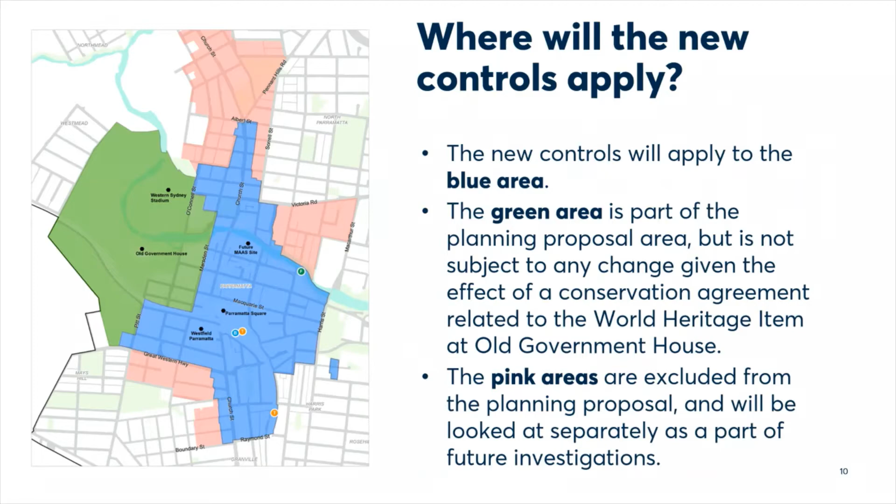So what will the planning proposal seek to do? So there are a couple of slides on this, and I do want to spend some time on it because these are very much our key objectives as a council. The first one is to expand the commercial core land zoning. Now, this will increase the commercial amount of floor space, therefore bringing an increased amount of jobs to the CBD. The B3 commercial core zone is proposed to be increased in size from 22 hectares to 38 hectares. That equals about a 75% increase.

This planning proposal also seeks to increase building heights and floor space ratios, which enables more apartments and office towers, bringing again more jobs and homes to the CBD. It amends the existing bonus floor space controls that encourage high quality design buildings, typically called design excellence, and also introduces new controls for high performing buildings.

It also has a fundamental component where it does also protect solar access to key public spaces, to protect those public spaces, particularly in winter, and also significant heritage items such as Lancer Barracks and Experiment Farm.

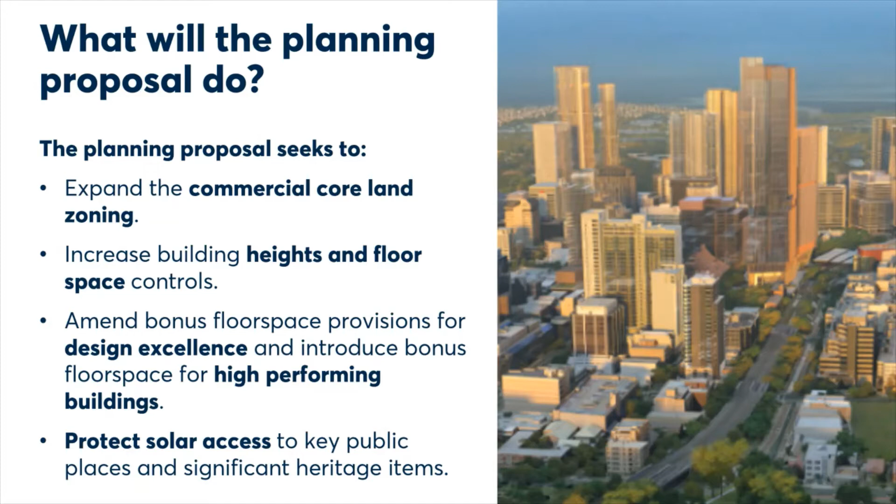Now, the planning proposal does seek to provide incentives for additional office and commercial development to facilitate the jobs and the services that we are seeking in the CBD. The planning proposal does seek to require new mixed-use residential towers to include community infrastructure as part of their development, which applies when development is seeking to utilise the additional floor space being offered under the planning proposal.

Now, what do we mean by community infrastructure? It essentially means things such as community facilities, public places and recreation facilities, and I'll get into a little bit more detail on that in a moment.

The planning proposal does provide controls which aim to protect heritage, including additional heritage controls and lower heights in some areas to protect heritage streetscapes or to minimise overshadowing on heritage conservation areas. It does require the ground floor of certain buildings to be activated with activated uses such as cafes and shops, so they provide interest for passing pedestrians and vibrancy along our streets.

The planning proposal also includes the following. It does reserve land for road widenings, bicycle lanes, etc. That's very important to protect future transport needs, particularly when we are proposing to increase density significantly. It does propose lower rates for car park provision, similar to those that you'll find in the Sydney CBD.

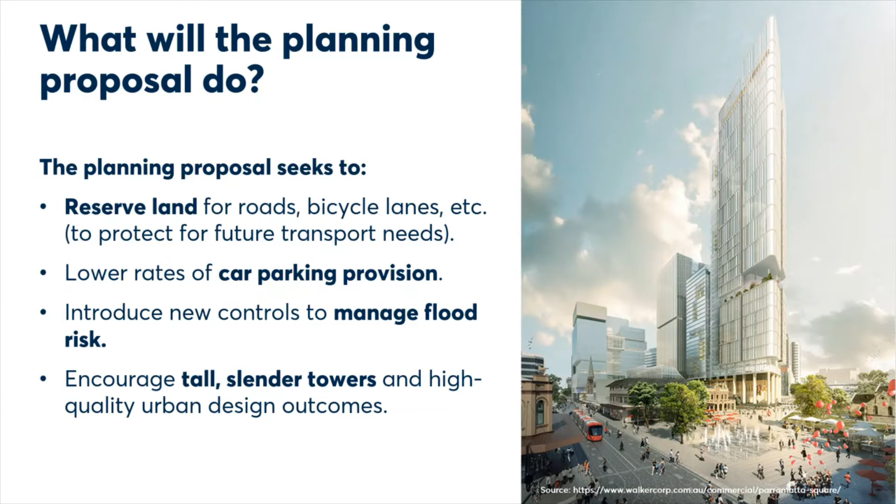So now I'm going to focus on some aspects of the planning proposal that might benefit from a more detailed explanation. I'll start with building height controls. So you will notice, if you have had a look at the planning proposal documentation, that there are two height maps in the documentation. The first map is referred to as the base height control, and it generally reflects the existing height controls in our current LEP 2011. It does also reflect site-specific PPs that have been notified or gazetted up until the 31st of July.

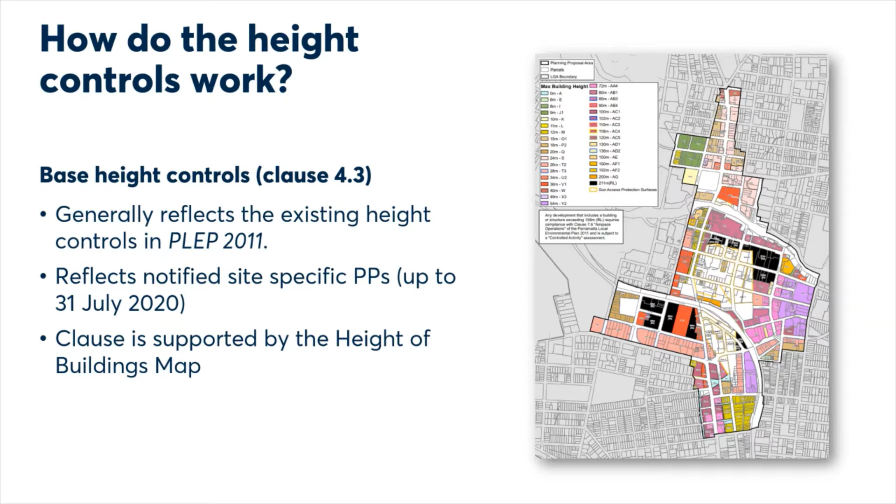Now, there's also a clause that supports the height of building maps. This essentially just identifies the base height control that's applicable to land within the CBD. There's then an incentive height controls map. So the first one was base, and this one's called incentive. Now, this applies to land that is zoned B4 mixed use, and can only be taken up if community infrastructure is provided under the proposed clause 7.6H. Now, this map again is supported by a clause.

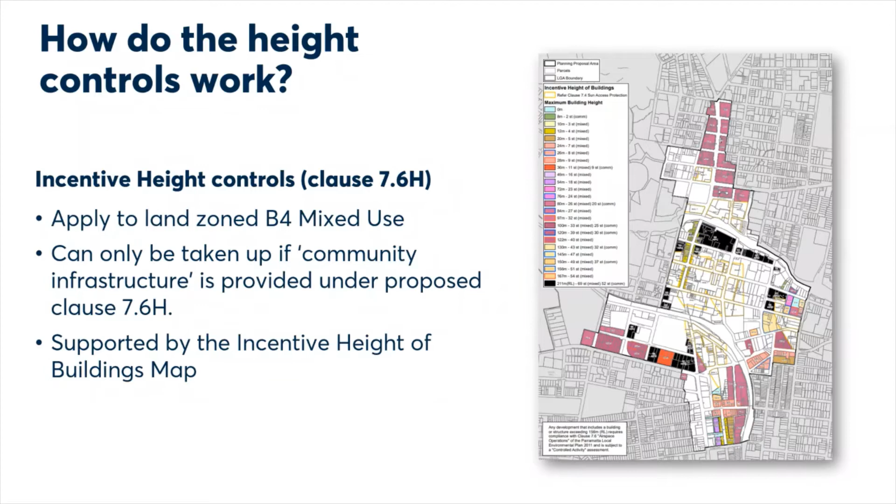Now, you will see that there is a fair amount of uncoloured sites on this map, and the reason for that is that these sites are zoned B3 commercial core, or have no uplift in height due to heritage, urban design or sun access requirements. These have all been backed by supporting technical studies, and so therefore the maximum heights for these sites are those that are shown on the base height map.

So both the base and incentive heights have a maximum mapped height of 211 metres. So that's roughly about 60 stories for a resi building and 53 stories for a commercial building. When combined with the design excellence bonus of 15%, that will allow buildings up to 243 metres. So that's about 75 stories for a residential building and 60 stories for a commercial building. Now, it is important to note that any height in the Parramatta CBD that is above 156 metres RL is a controlled activity under the Airports Act, and therefore requires referral to the relevant airport authorities.

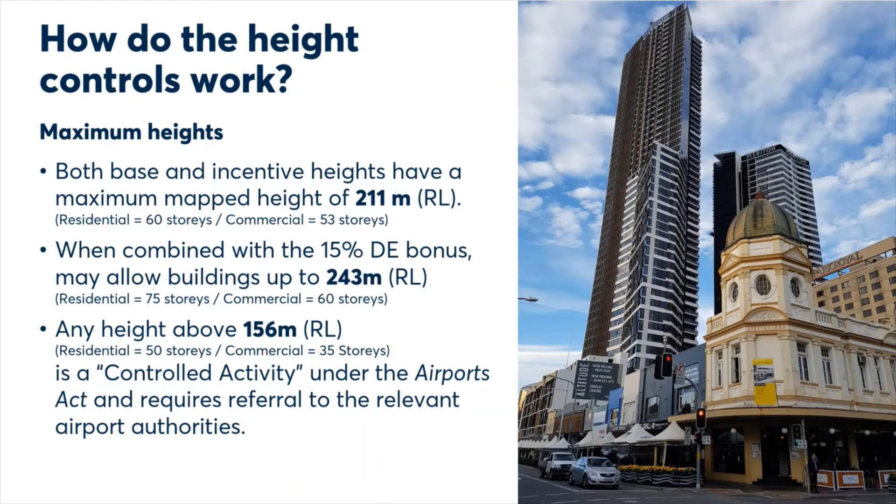Okay, so now I'll cover the floor space ratio controls. These are a little bit more complex than the height controls. But similarly, if you've had a look at the planning proposal documentation, you would have noticed again two FSR maps. There's a base FSR map and then there's an incentive FSR map. So with the base FSR map, generally, again, these reflect the existing FSR controls that you will see in our current LEP. This map has been updated to reflect site-specific PPs that have been gazetted or notified up to the 31st of July. The base map is not subject to the FSR sliding scale, and again, there's a clause that accompanies this FSR map.

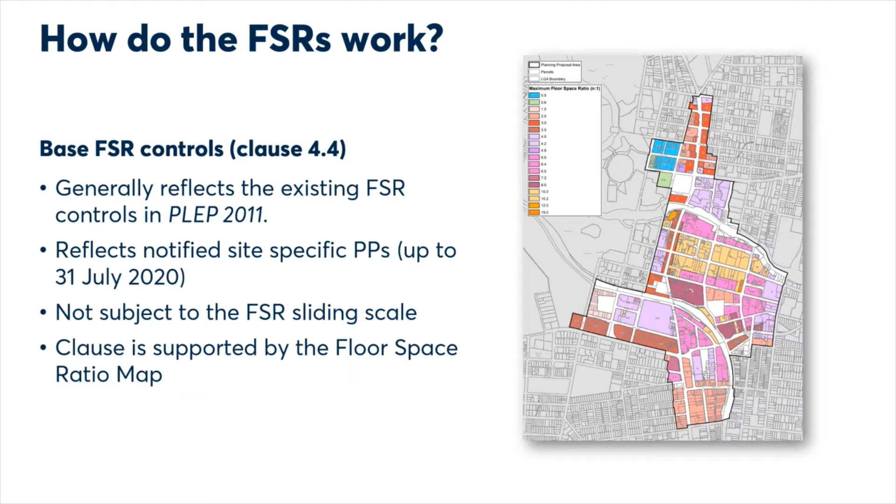So there is also the incentive FSR map. This applies to all land zoned B4 mixed use. And again, this can only be taken up if community infrastructure is provided on the sites as described within the clause within the documentation. And again, this is supported by a clause. Now, you'll see again, similarly with the incentive heights map, that there are uncoloured sites on this map. Those uncoloured sites are essentially those sites that are zoned B3 commercial core, or again have no uplift in FSR due to heritage, urban design or sun access requirements. And so therefore the maximum controls that apply for those sites will be the base FSR map.

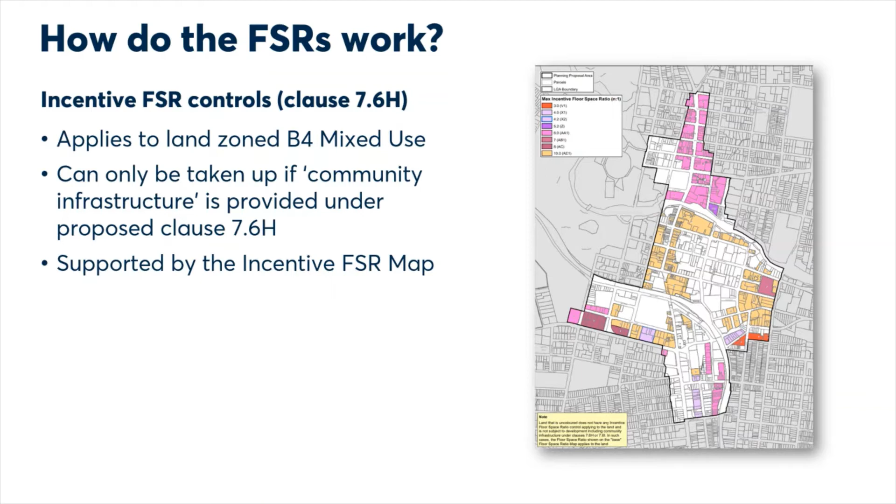So how do these FSRs work? To address the increased demand on infrastructure, Council does need to assist in providing new or enhanced infrastructure. And so the provisions within the planning proposal require certain development utilising the incentive FSR and height to provide community infrastructure. Now, this community infrastructure includes things such as community facilities, public space or recreational facilities on sites.

Now, the important point to make here is that prior to completion of the planning proposal, Council will need to undertake a review of the infrastructure funding framework for the CBD, including the preparation of a new development contributions plan to assist in the funding and the delivery of community infrastructure within the CBD, particularly when we are seeking a significant increase in dwelling and job numbers over the 40-year period.

So a bit more on FSRs, particularly when it comes to design excellence. The Council is very passionate about raising the bar when it comes to the delivery of design excellence, not only through our public domain work, but then also in buildings. So we have revised the design excellence controls as part of this planning proposal. So fundamentally, our objective is to promote and to secure high quality development.

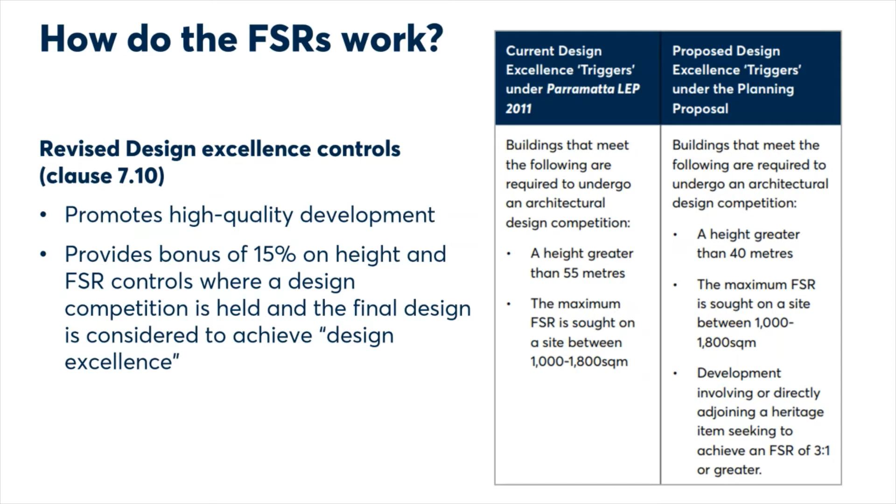This planning proposal also seeks to introduce a new provision that's not currently within our current planning framework, and that's the high performing buildings clause. Now, it does provide a bonus FSR of 5%, subject to achieving higher environmental performance above BASIX. Now, this would apply to sites with a 6 to 1 FSR or higher. And the bonus FSR is only applicable for residential flat buildings and mixed-use developments that include a residential component.

Mandatory environmental performance requirements for certain commercial buildings are also included. The specific requirements include achieving specified targets for energy emissions and water use. And this is very much around increasing and elevating the need for better designed and performing buildings, particularly from an environmental perspective.

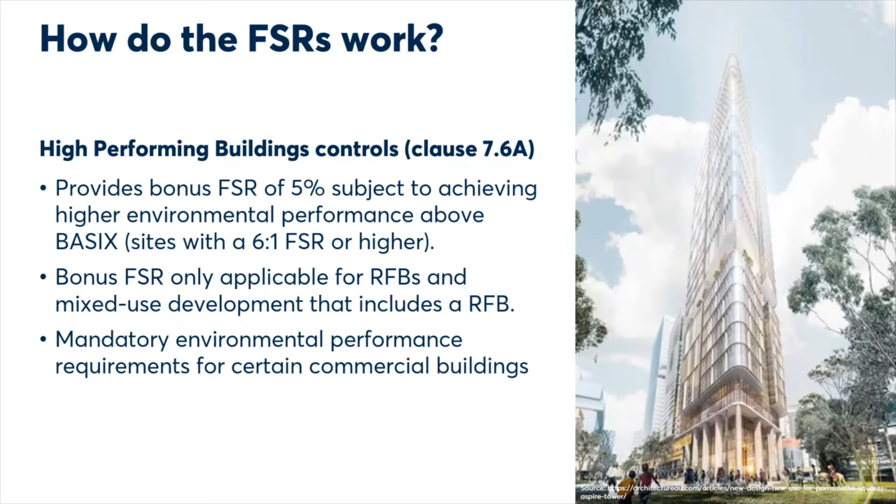So there is an opportunity sites map that some of you may have seen within the documentation. This is a new provision which provides a bonus of up to 3 to 1 on these sites that are highlighted in beige or yellow, but they must meet certain criteria, and that relates to design, geometry and site size. And if that criteria is met, that is described within the accompanying clause, then that site could benefit from an additional FSR of 3 to 1.

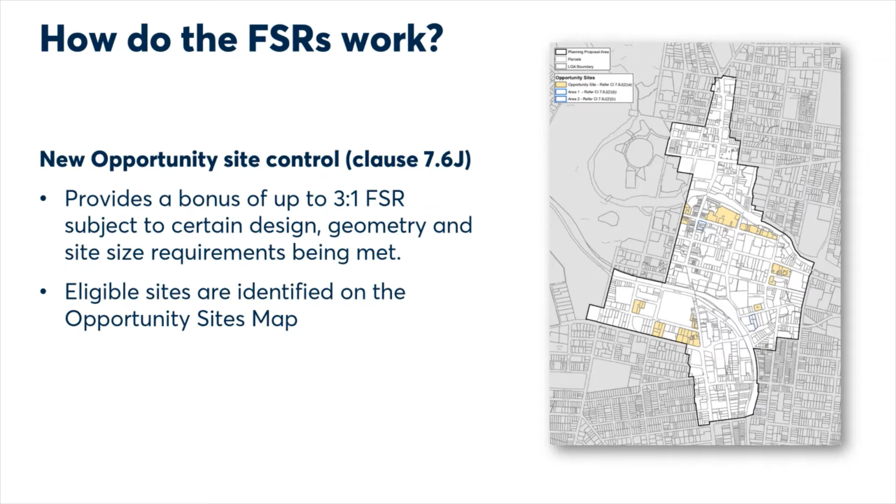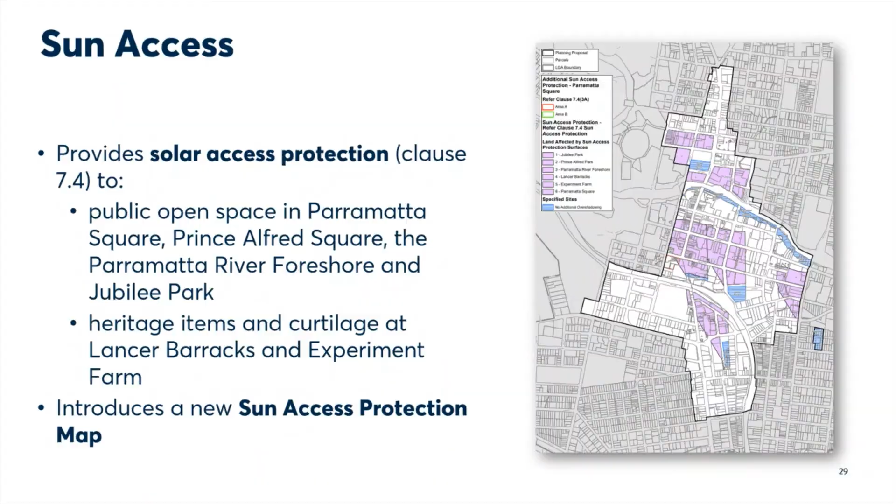Now, heritage protection. So this is critical for Parramatta for two reasons. Firstly, there are many heritage sites in and adjacent to the CBD. And secondly, the CBD also abuts an important internationally significant heritage precinct, being Old Government House and its domain. So what are we doing in this PP to protect heritage? So we have sought to apply lower heights and FSRs in certain cases to minimise impact on heritage.

Some examples of where we've done this include the western end of the Great Western Highway to protect solar access to South Parramatta Heritage Conservation Area, Church Street to protect the heritage streetscape, northern and western areas immediately adjoining St John's Cemetery to minimise impacts to the heritage cemetery. There is also amending the trigger for design competition, which I mentioned earlier. So any significant buildings next to heritage items would be required to undertake a design competition.

We have also introduced a new clause in addition to the existing standard template clause of 5.10 in the existing LEP. Now that very much relates to ensuring that there are heads of considerations that need to be addressed as part of the assessment of a DA. And so the details of that are in the documentation if you're particularly interested in that.

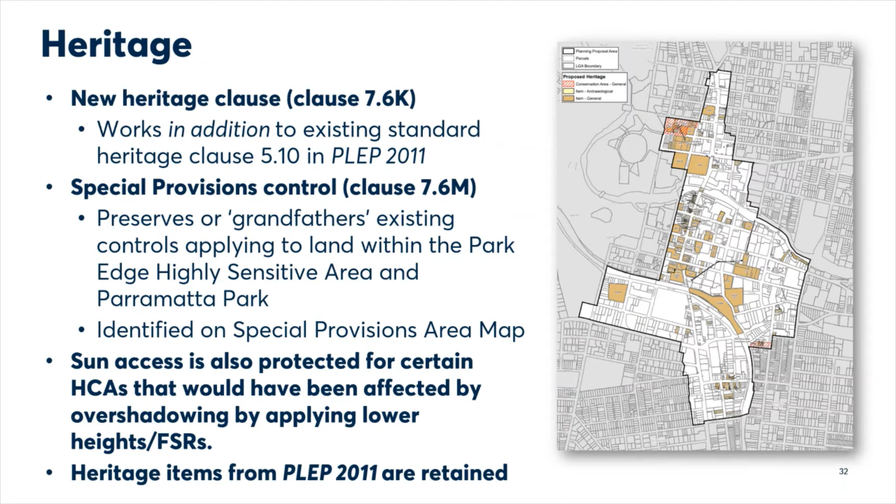So, as I mentioned earlier, the Parramatta CBD is located on the floodplain, and so we need to demonstrate how increased density can be accommodated on the floodplain while still addressing and minimising stormwater and flood risk. So we are proposing a new clause within the documentation. The new clause applies to land affected by the probable maximum flood. Now, our strategy here is to allow for shelter in place.

Now, all sites must have an emergency access point that is above the 1% flood level to manage secondary risks. We do have provisions in the clause and the documentation to ensure that all sites also need to withstand the forces of floodwaters and debris. And this is supported by the revised flood risk management plan that is also on public exhibition.

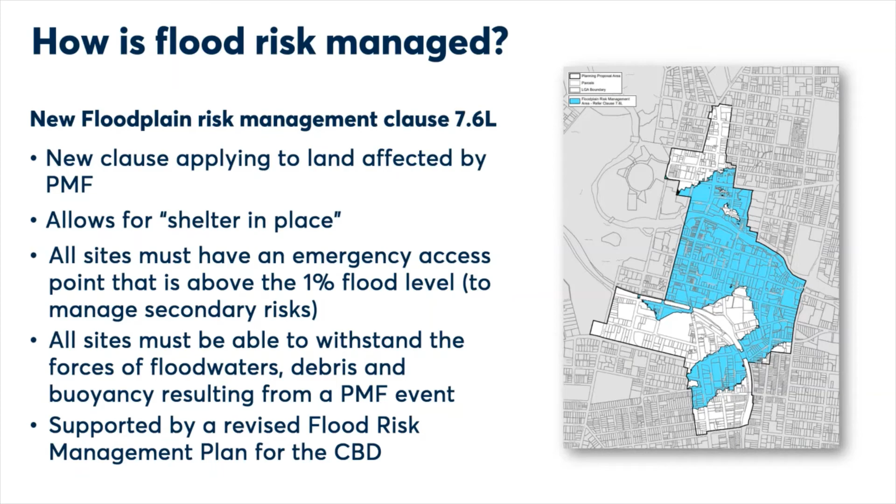So overall, the proposal provides a number of benefits. In summary, improved environmental outcomes through a new high-performing buildings clause and better flood risk management, very much suited and tailored for Parramatta. More opportunities for jobs and businesses, particularly when looking at the increased FSRs and incentivising commercial developments. Connecting community infrastructure to the provision of increased yields. Improving urban design outcomes, particularly around street activation, solar access and design excellence. And including new protections for heritage through new controls.

Now, I'll briefly cover, we're almost at the end here, the community engagement program and how we're actually engaging with the community and industry. So we are holding a six-week exhibition period, so 2 weeks longer than what we would ordinarily have to do, given the climate that we're in. The conclusion of the engagement period is the 2nd of November. So submissions are due by that date.

So you will see that there are a number of ways that we are engaging and communicating this important piece of work. There's obviously a lot of information on the Council's website. We have notified just shy of 30,000 households and businesses, notifying them of the exhibition. There's obviously summary sheets and fact sheets that have been produced. We're holding this forum. I'm also participating in a range of other forums that I've been invited to.